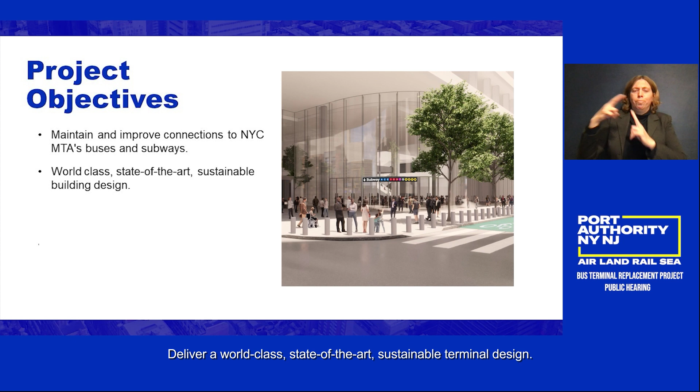Project Objectives. An important guiding principle driving this project is the enhancement of the commuter experience within the bus terminal. This principle has played a pivotal role in shaping the following project objectives: maintain and enhance connectivity with subways and mass transit, deliver a world-class, state-of-the-art, sustainable terminal design, preserve and improve pedestrian and ADA accessibility to traveler origins and destinations, and establish direct bus linkages to the Lincoln Tunnel.

There is more detailed information about the project purpose and need, its goals and objectives, in the Draft Environmental Impact Statement Reports Chapters 1 and 2.

Community Feedback. In this section, we will review the extensive community engagement conducted to date.

In May 2019, the Port Authority released a planning-level scoping document for public review that commenced a 120-day comment period. The document identified a long list of alternatives that were screened down to 3 alternatives that best met the project purpose and need. These 3 alternatives were: split operations between a rehabilitated bus terminal and the Javits Center, locate operations entirely at the Javits Center, and retain operations at the existing bus terminal site and Port Authority properties.

The planning-level draft scoping document, summary of comments and responses, and final scoping report summarizing this process and outcome are all available on the project website, www.pabtreplacement.com.

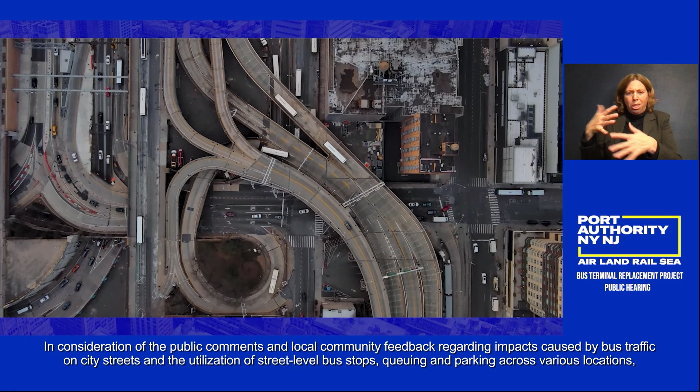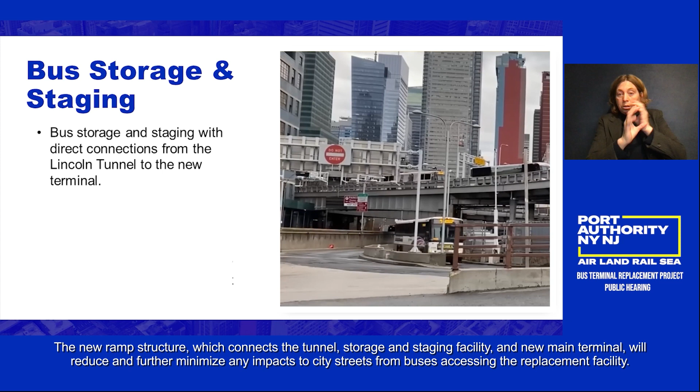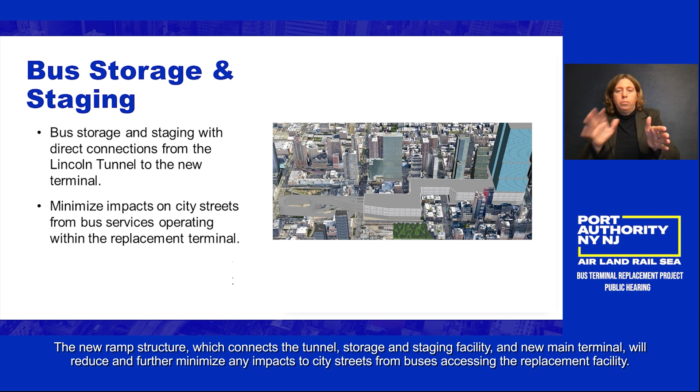Bus storage and staging. In consideration of the public comments and local community feedback regarding impacts caused by bus traffic on city streets and the utilization of street-level bus stops, queuing and parking across various locations, the Port Authority responded by incorporating a bus storage and staging facility that will facilitate direct connections between the Lincoln Tunnel and the new terminal. The new ramp structure, which connects the tunnel, storage and staging facility, and new main terminal, will reduce and further minimize any impacts to city streets from buses accessing the replacement facility.

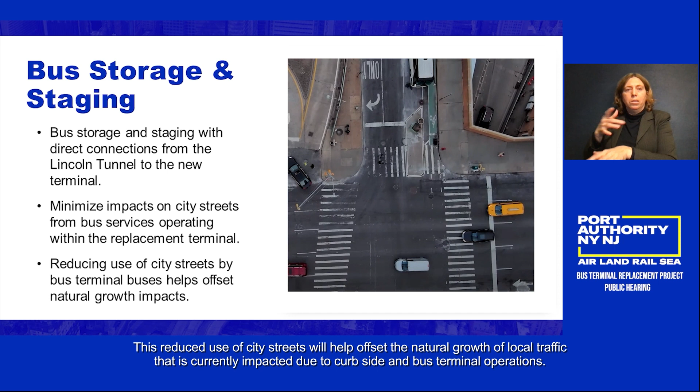This reduced use of city streets will help offset the natural growth of local traffic that is currently impacted due to curbside and bus terminal operations.

Additionally, during the planning level scoping process, the community put forth a request to the Port Authority to relocate the intercity buses presently operating at adjacent curbside locations into the scope of the project.

Unlike a transit bus service, which has frequent stops within a city, an intercity bus service generally has a single stop in a city and travels long distances to reach other cities. Presently, some intercity bus services operate within the existing terminal, while others operate curbside along city streets.

In response to the public comments regarding curbside operations, a dedicated floor within the new main terminal will now facilitate the efficient functioning of curbside operations.

Project overview and site plans. In this next section, we share renderings of each project component.

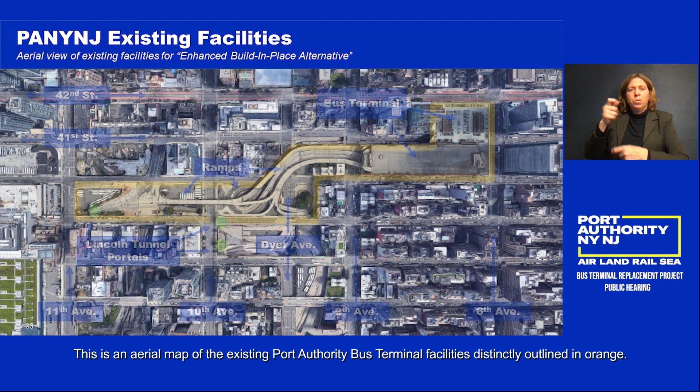This is an aerial map of the existing Port Authority bus terminal facilities, distinctly outlined in orange. The facilities extend from 8th Avenue to 11th Avenue between 39th Street and 42nd Street.

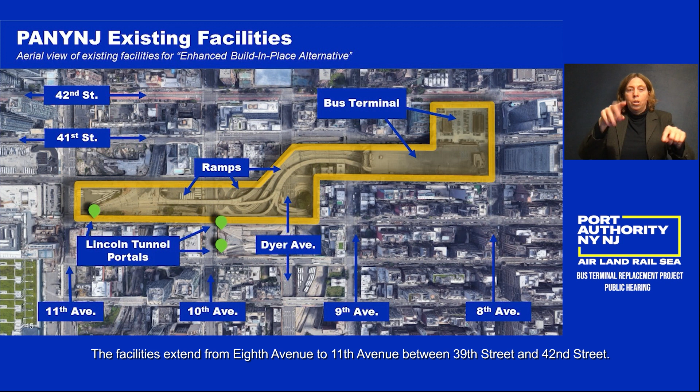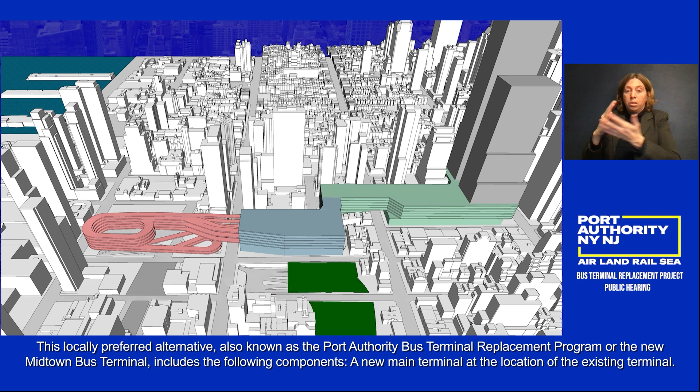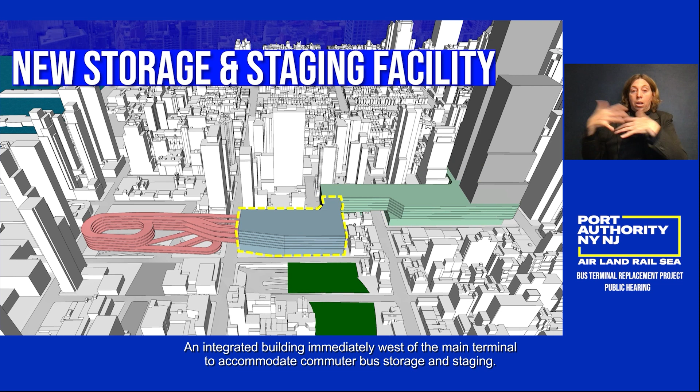Project components. This locally preferred alternative, also known as the Port Authority Bus Terminal Replacement Program, or the New Midtown Bus Terminal, includes the following components: a new main terminal at the location of the existing terminal, utilization of Port Authority property, an integrated building immediately west of the main terminal to accommodate commuter bus storage and staging,

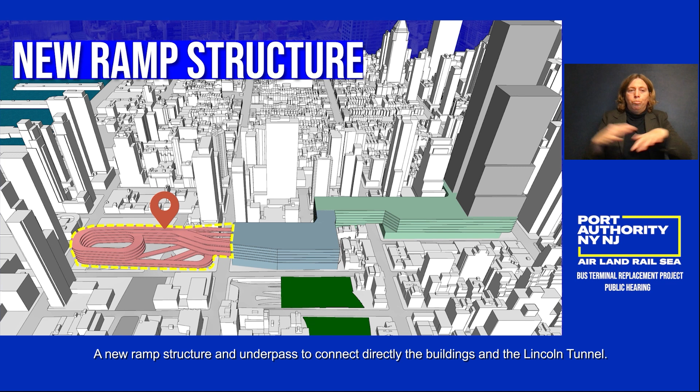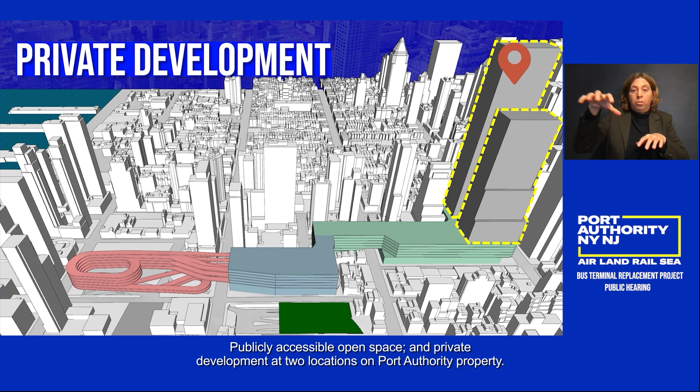a new ramp structure and underpass to connect directly the buildings and the Lincoln Tunnel, publicly accessible open space, and private development at 2 locations on Port Authority property. Now we will walk through each major component of the proposed project.

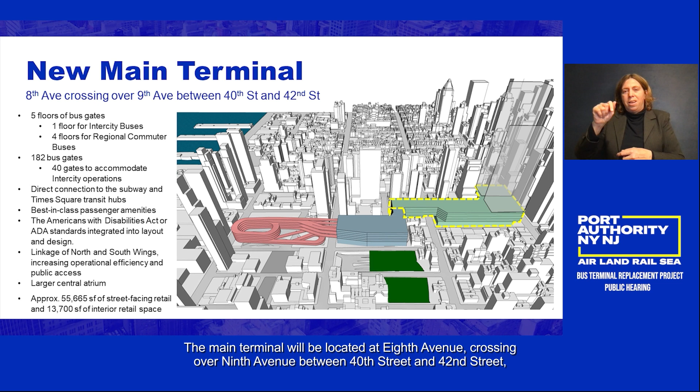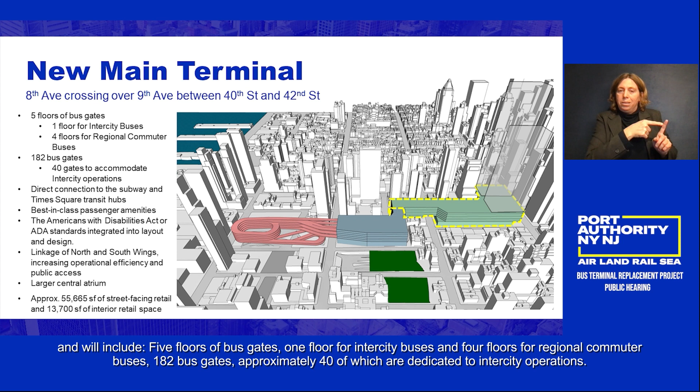The main terminal will be located at 8th Avenue crossing over 9th Avenue between 40th Street and 42nd Street and will include 5 floors of bus gates, 1 floor for intercity buses, and 4 floors for regional commuter buses. 182 bus gates, approximately 40 of which are dedicated to intercity operations. Direct connection to the 8th Avenue subway and Times Square transit hubs.

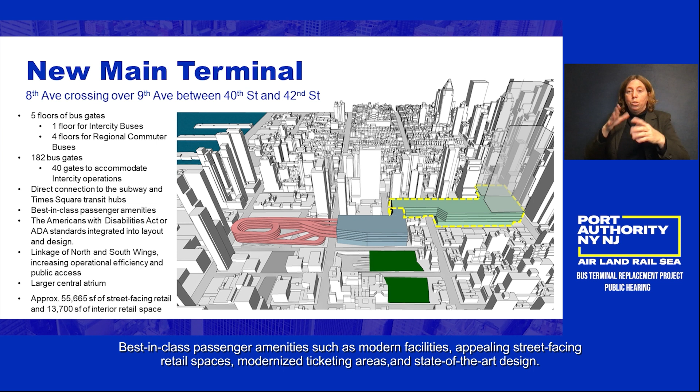Best-in-class passenger amenities such as modern facilities, appealing street-facing retail spaces, modernized ticketing areas, and state-of-the-art design. The Americans with Disabilities Act or ADA standards integrated into layout and design.

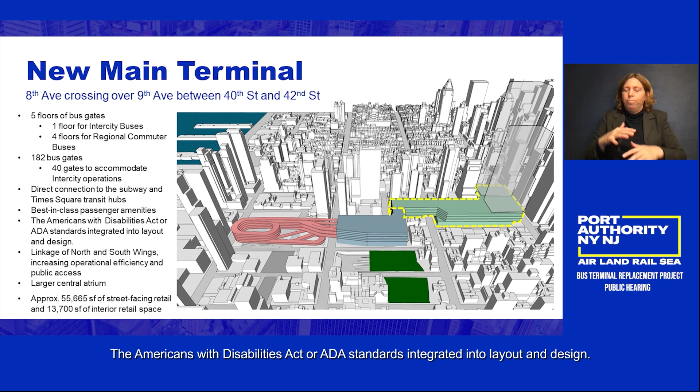A partial closure of 41st Street will create a linkage of a north and south wing, increasing operational efficiency and public access. Larger central atrium, and finally, approximately 55,665 square feet of street-facing retail space, as well as 13,700 square feet of interior retail space.

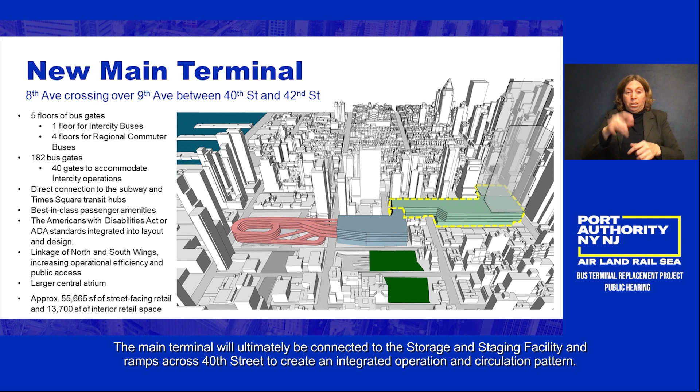The main terminal will ultimately be connected to the storage and staging facility and ramps across 40th Street to create an integrated operation and circulation pattern.

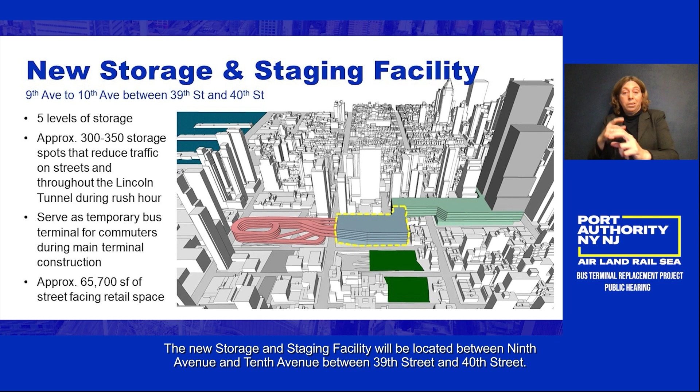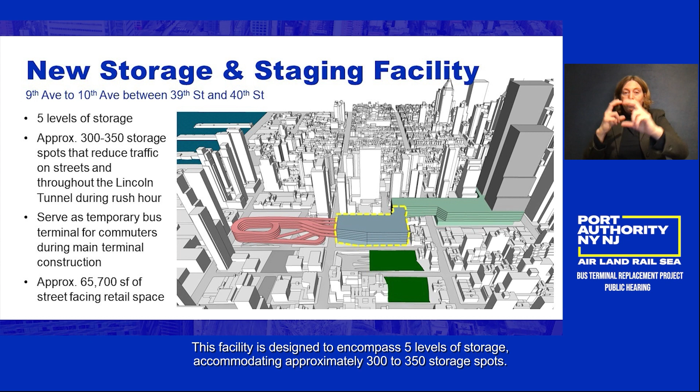The new storage and staging facility will be located between 9th Avenue and 10th Avenue, between 39th Street and 40th Street. This facility is designed to encompass 5 levels of storage, accommodating approximately 300 to 350 storage spots. This additional storage space is anticipated to reduce vehicular congestion on city thoroughfares and throughout the Lincoln Tunnel during rush hour.

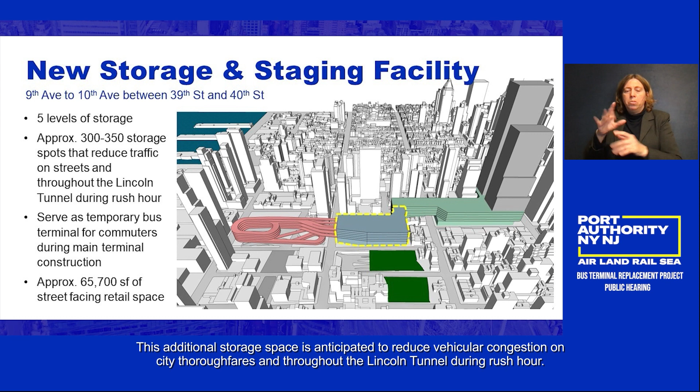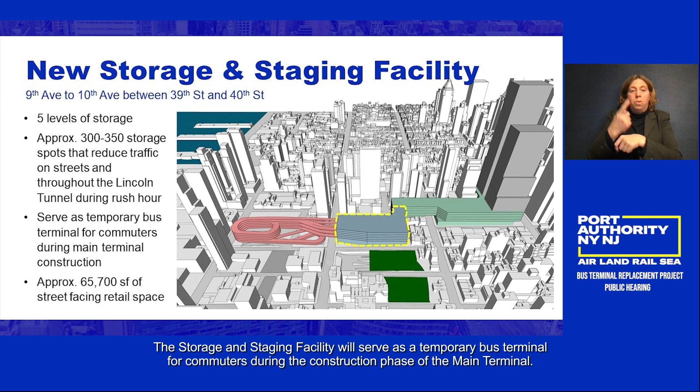The storage and staging facility will serve as a temporary bus terminal for commuters during the construction phase of the main terminal. Additionally, the facility will provide approximately 65,700 square feet of additional at-grade retail space.

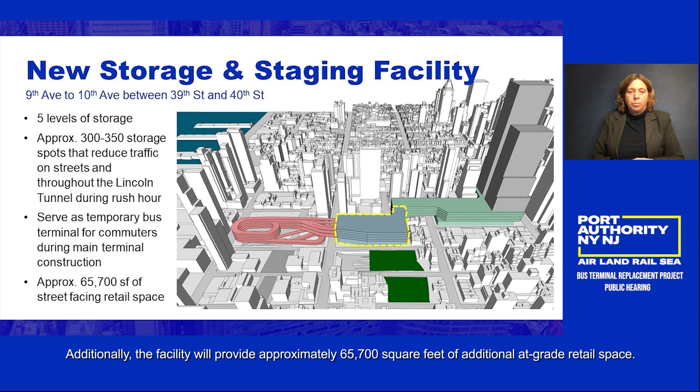The new ramp structure will be located at Galvin Plaza, west of 10th Avenue. The ramp structure will serve all bus movements into and out of the above-grade bus levels of the replacement facility, to and from the Lincoln Tunnel.

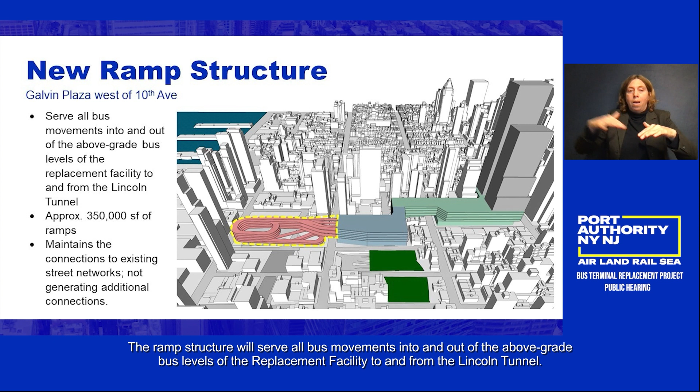Spanning an area of approximately 350,000 square feet, the ramp structure will connect to the storage and staging facility and main terminal. The design of the ramps will greatly relieve congestion on 40th Street and 9th Avenue. This ramp structure design will also enhance the quality of the urban streetscape while optimizing bus reliability.

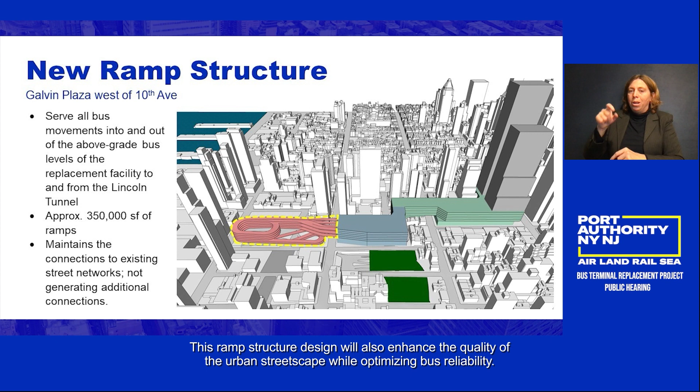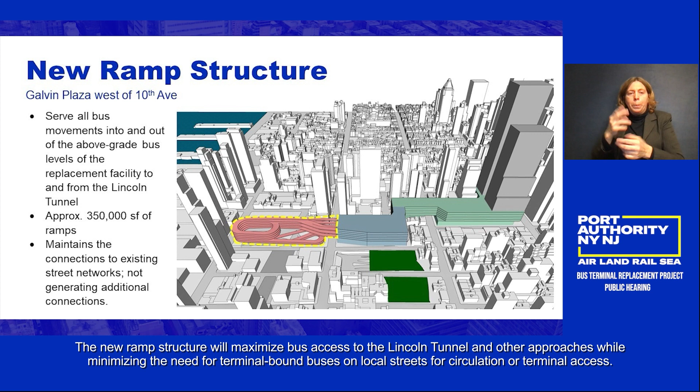The new ramp structure will maximize bus access to the Lincoln Tunnel and other approaches while minimizing the need for terminal-bound buses on local streets for circulation or terminal access.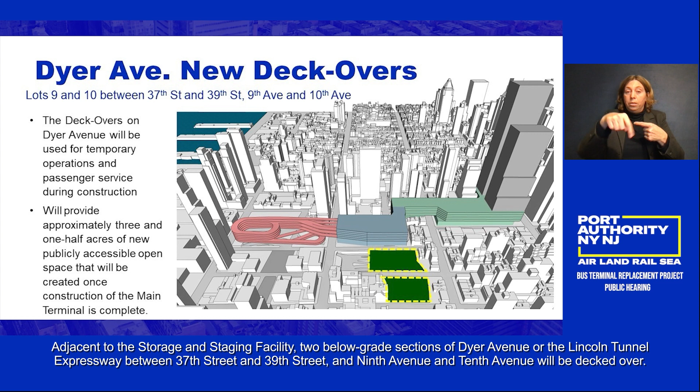Adjacent to the Storage and Staging Facility, two below-grade sections of Dyer Avenue, or the Lincoln Tunnel Expressway, between 37th Street and 39th Street, and 9th Avenue and 10th Avenue, will be decked over. The deckovers on Dyer Avenue will serve as a location for temporary bus operations and potentially for construction staging during the development phase of the replacement terminal.

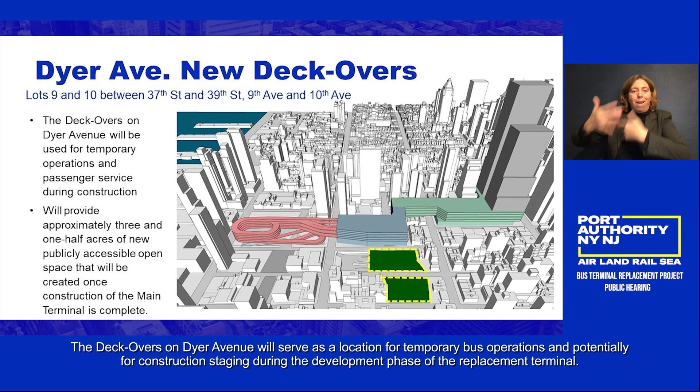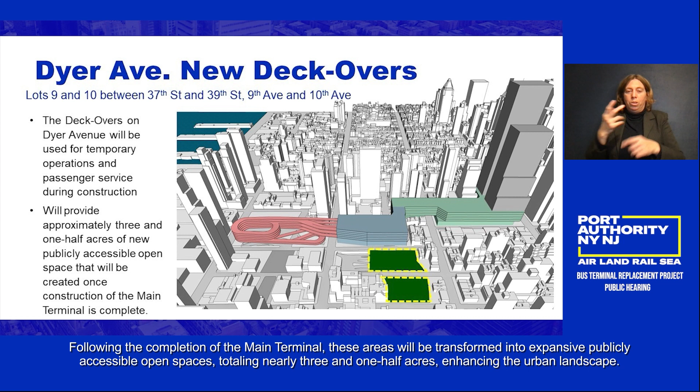Following the completion of the main terminal, these areas will be transformed into expansive, publicly accessible open spaces, totaling nearly 3½ acres, enhancing the urban landscape.

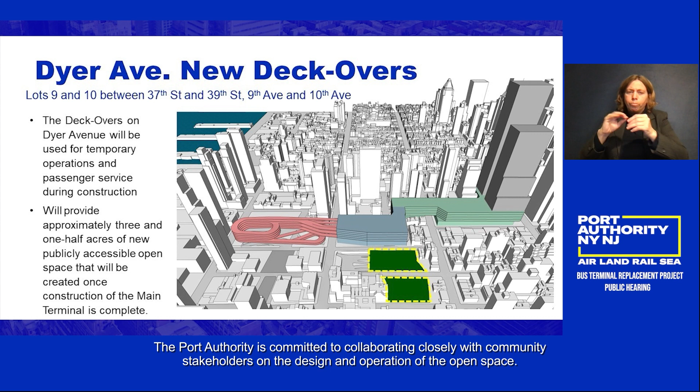The Port Authority is committed to collaborating closely with community stakeholders on the design and operation of the open space. At this time, no specific design or range of options has been put forth for the development of this open space, as a consultative process will occur in the future.

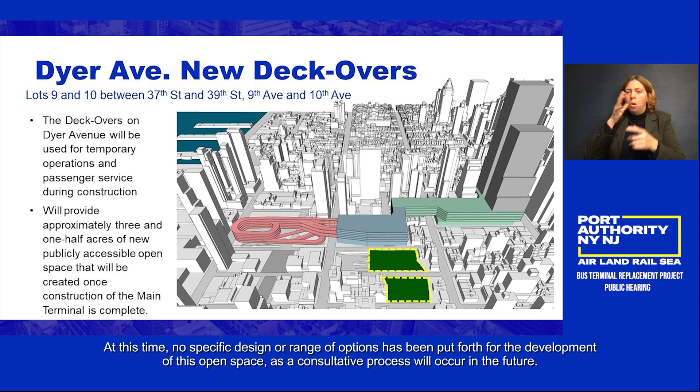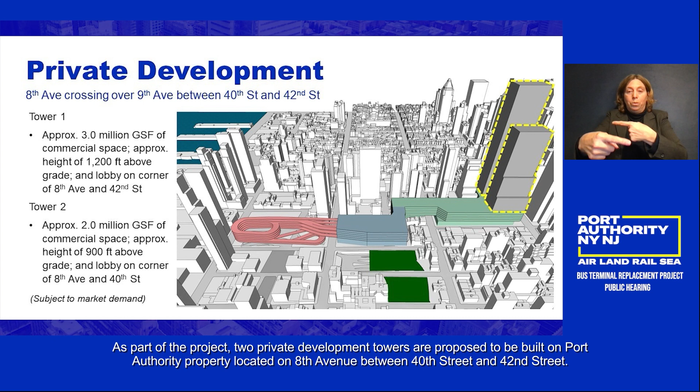As part of the project, two private development towers are proposed to be built on Port Authority property located on 8th Avenue between 40th Street and 42nd Street. The two towers are proposed as commercial offices.

Tower 1 would contain up to approximately 3 million gross square feet of commercial space, with an approximate height of 1,200 feet above grade and a lobby entrance located on the corner of 8th Avenue and 42nd Street.

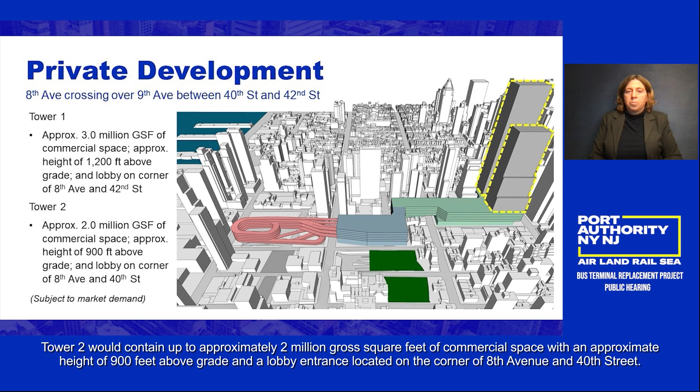Tower 2 would contain up to approximately 2 million gross square feet of commercial space, with an approximate height of 900 feet above grade and a lobby entrance located on the corner of 8th Avenue and 40th Street. These approximations are subject to market demand.

The funding strategy for the project would include financing from this private development and payment in lieu of taxes.

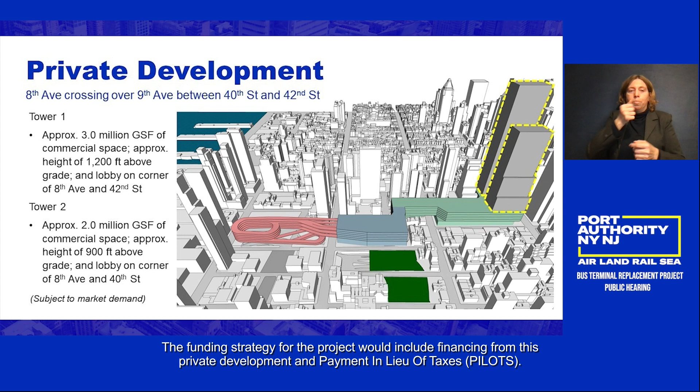Upon completion, the Port Authority Bus Terminal will provide many advantages to its diverse customers, community members, and various stakeholders, including an elevated public realm, significantly enhanced user experience, improved vehicular and pedestrian flow, and green energy transition, to name a few. Beginning with the elevated public realm, there will be major improvements in the streetscape, including the integration of

street-facing storefronts throughout the project site and appropriately scaled sidewalks and pedestrian areas for diverse users. The conversion of the Dyer Avenue deck-overs into publicly accessible space will further augment these improvements to the public realm.

The creation of a larger central atrium by linking the north and south wings will enable intuitive wayfinding and significantly enhance the spatial experience of the terminal.

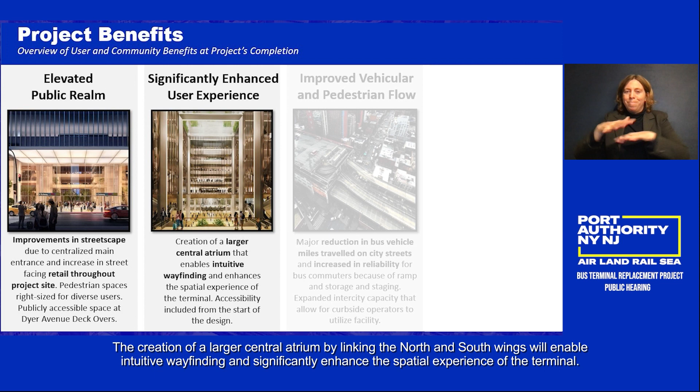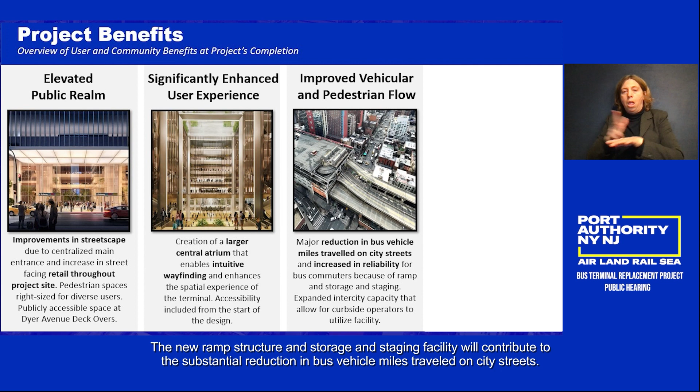The new ramp structure and storage and staging facility will contribute to the substantial reduction in bus vehicle miles traveled on city streets. This streamlined traffic flow will enhance the reliability of bus commutes, benefiting the experience of commuters. Moreover, the expanded intercity capacity will accommodate curbside operators using the facility.

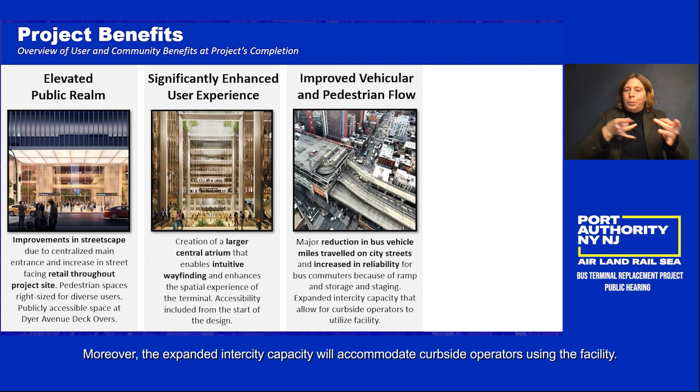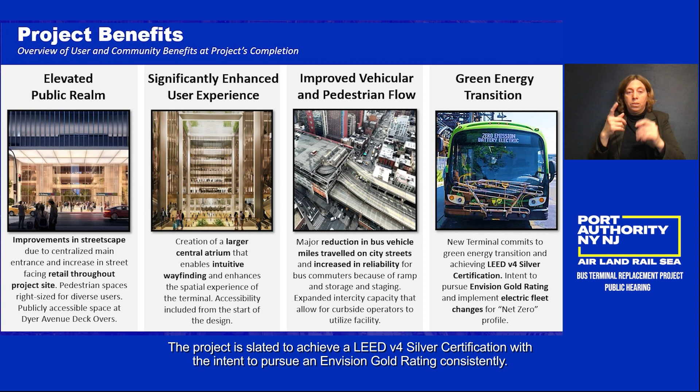Lastly, the new terminal will embrace a green energy transition. The project is slated to achieve a LEED v4 Silver certification with the intent to pursue an Envision Gold rating consistently. This aligns with the adoption of electric fleet changes and the incorporation of modern energy-efficient systems within the terminal, striving towards a net zero carbon profile.

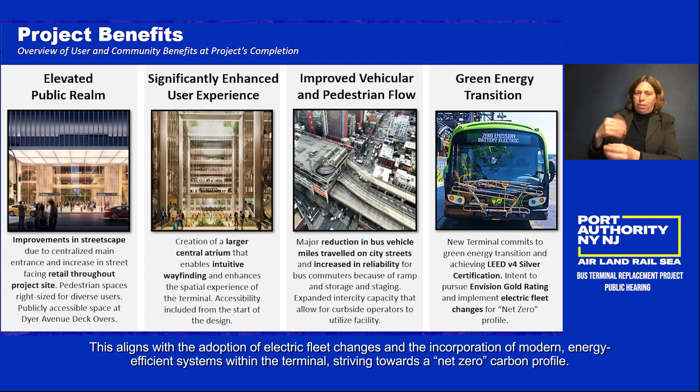In this next section, we will provide an overview of the project phasing as well as the construction process.

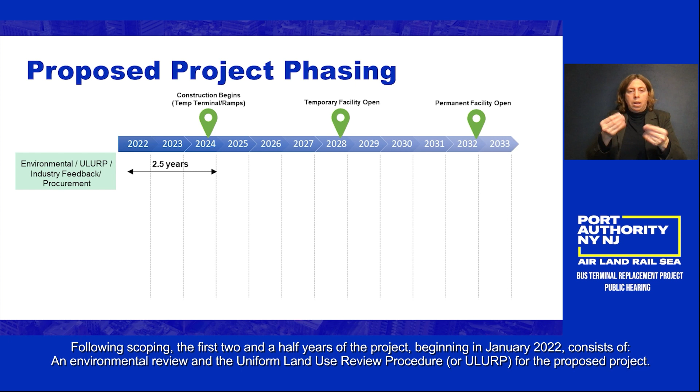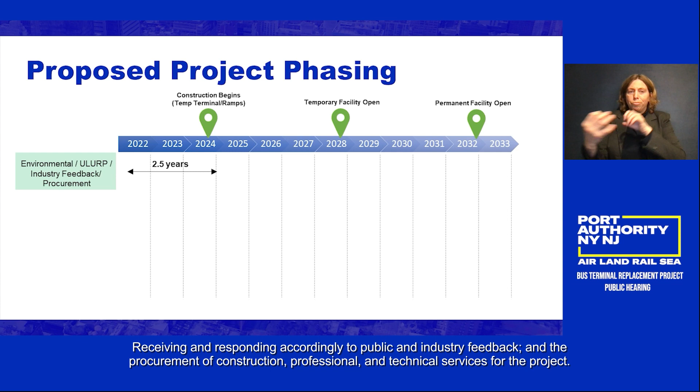The project timeline is estimated to be approximately 10 years. Following scoping, the first 2.5 years of the project, beginning in January 2022, consists of an environmental review and the Uniform Land Use Review Procedure, or ULURP, for the proposed project, receiving and responding to public and industry feedback, and the procurement of construction, professional, and technical services for the project.

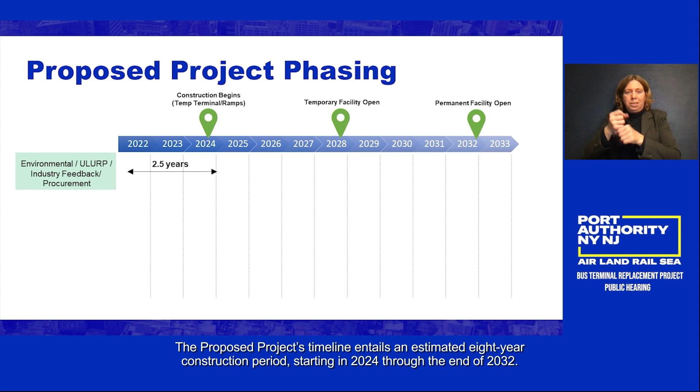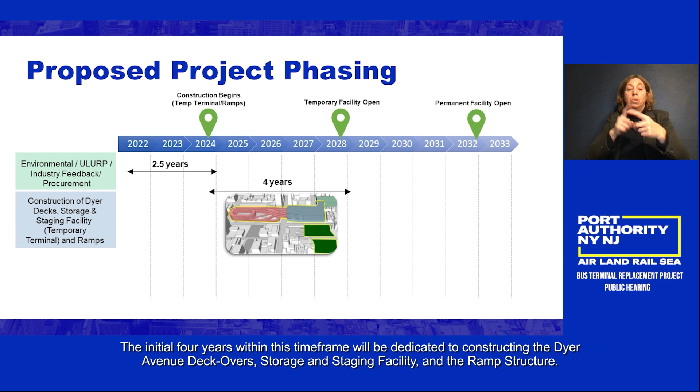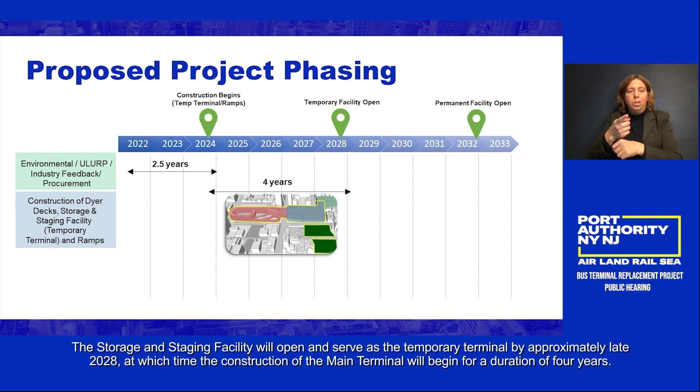The proposed project's timeline entails an estimated 8-year construction period, starting in 2024 through the end of 2032. The initial 4 years will be dedicated to constructing the Dyer Avenue deckovers, storage and staging facility, and the ramp structure. The storage and staging facility will open and serve as the temporary terminal by approximately late 2028, at which time construction of the main terminal will begin for a duration of 4 years.

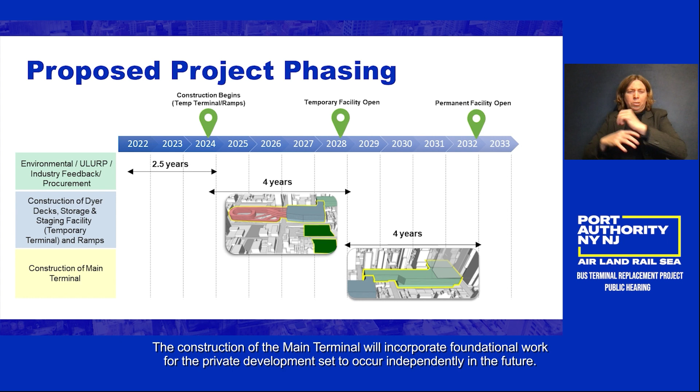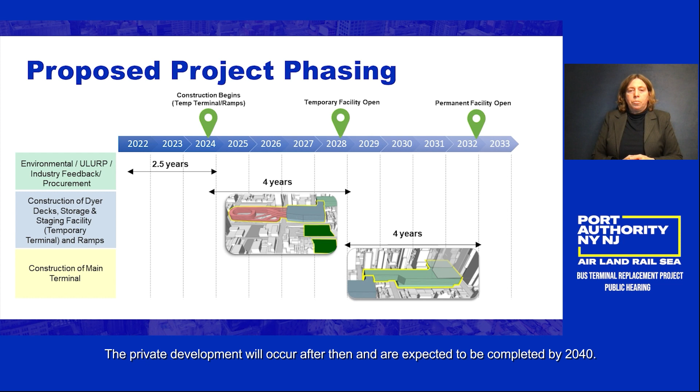The construction of the main terminal will incorporate foundational work for the private development set to occur independently in the future. Construction of the main terminal is anticipated to be completed by the end of 2032. The private development will occur after that and is expected to be completed by 2040.

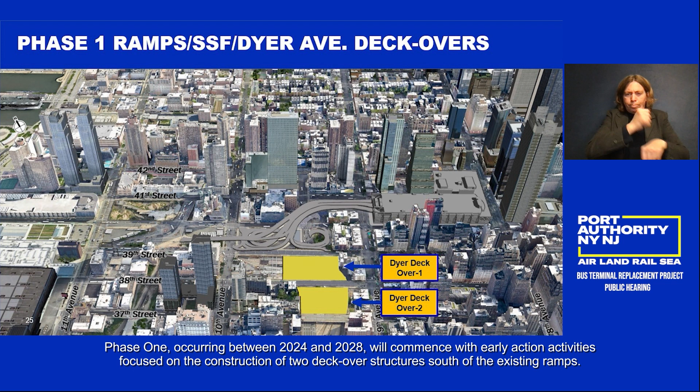The following renderings will depict the 8-year construction period organized into 2 major phases. Phase 1, occurring between 2024 and 2028, will commence with early action activities focused on the construction of 2 deck-over structures south of the existing ramps. These deckovers will be placed over the mouth of the south and center tubes of the Lincoln Tunnel.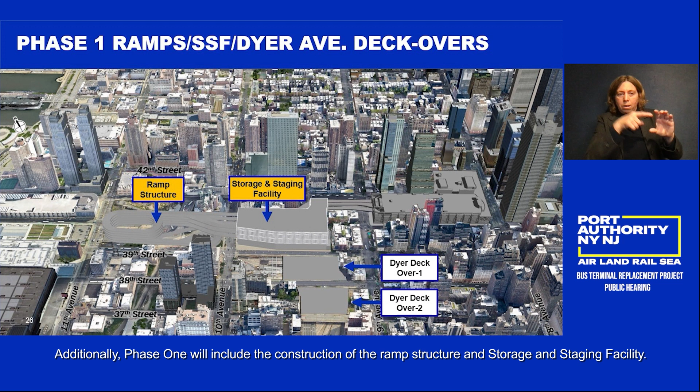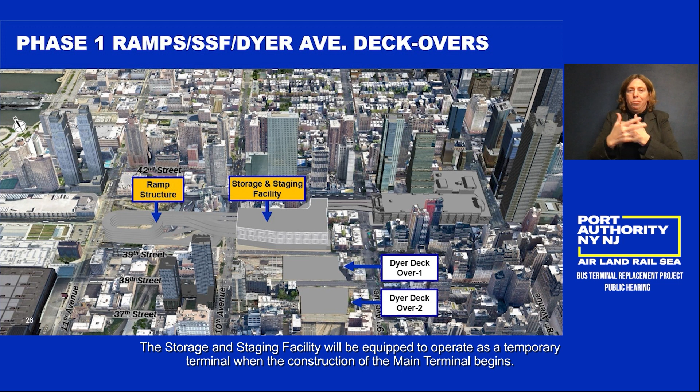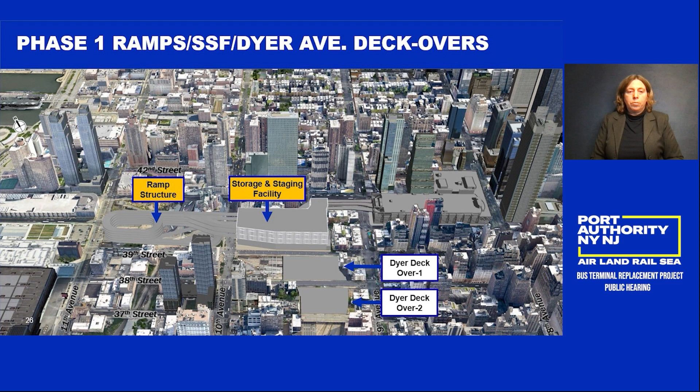Additionally, Phase 1 will include the construction of the ramp structure and storage and staging facility. The storage and staging facility will be equipped to operate as a temporary terminal when construction of the main terminal begins. This strategic adaptation will allow the continuity of essential transportation services during the onset of construction for the main terminal, thus minimizing disruptions and maintaining uninterrupted transportation services throughout the subsequent phases of the project.

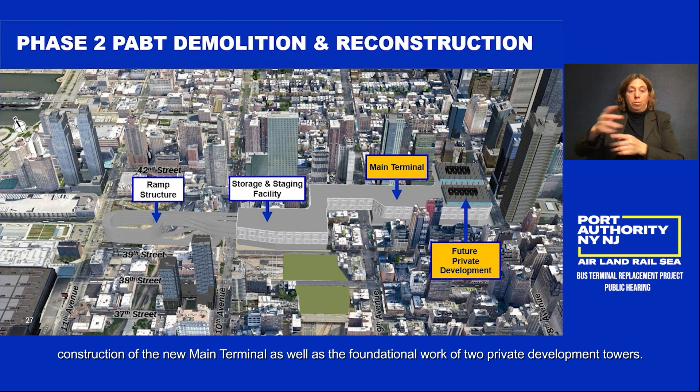Once the storage and staging facility is available for temporary operations, Phase 2, occurring between 2028 and 2032, will consist of demolition of the existing Port Authority bus terminal, construction of the new main terminal, as well as the foundational work of 2 private development towers.

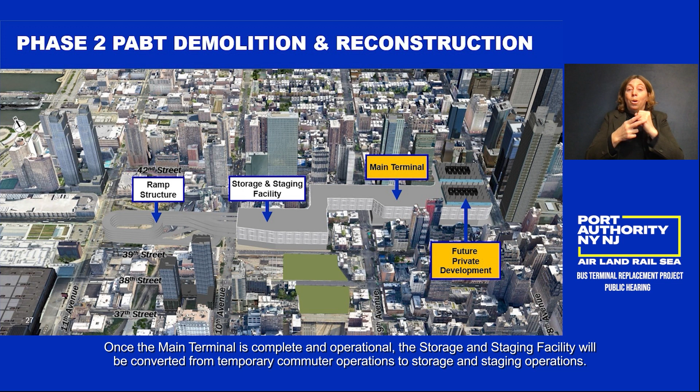Once the main terminal is complete and operational, the storage and staging facility will be converted from temporary commuter operations to storage and staging operations. The Dyer Avenue deckovers can then be converted to public open space, with the foundation and cores of 2 private towers incorporated in the design and construction of the new bus terminal.

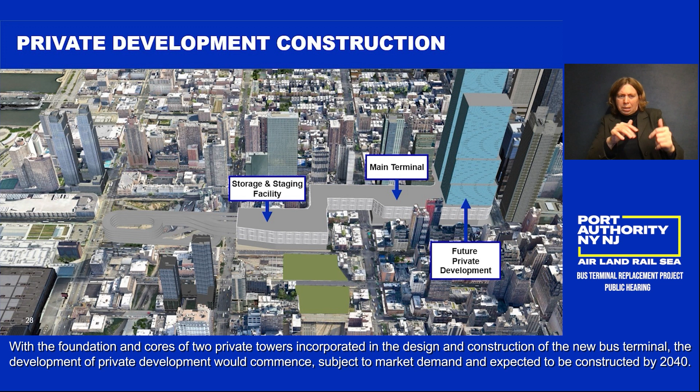The development of private development would commence subject to market demand and is expected to be constructed by 2040. The sale of the development rights and payment in lieu of taxes for the 2 commercial office towers are needed to fund the project. In this next section, we will conclude with an overview of the environmental timeline and next steps.

At present, the project is positioned at Step 5 within its comprehensive planning and environmental review process. The DEIS public hearings and 45-day comment period began with the publication of the DEIS.

In terms of next steps, the project team will consolidate all comments received during public meetings, including those submitted via the project website, email, mail, and voicemail. Then the project will progress to Step 6, in which the team will prepare and release a final environmental impact statement and the record of decision by the summer of 2024.

Following this presentation, attendees will have the opportunity to provide comments. For those who have pre-registered to provide a comment, the moderator will call upon your name in the order in which your registration was received. Each participant will have 3 minutes to articulate their comments. If you have not pre-registered, you may request to do so once the public hearing is underway, and you will be called upon if time permits.